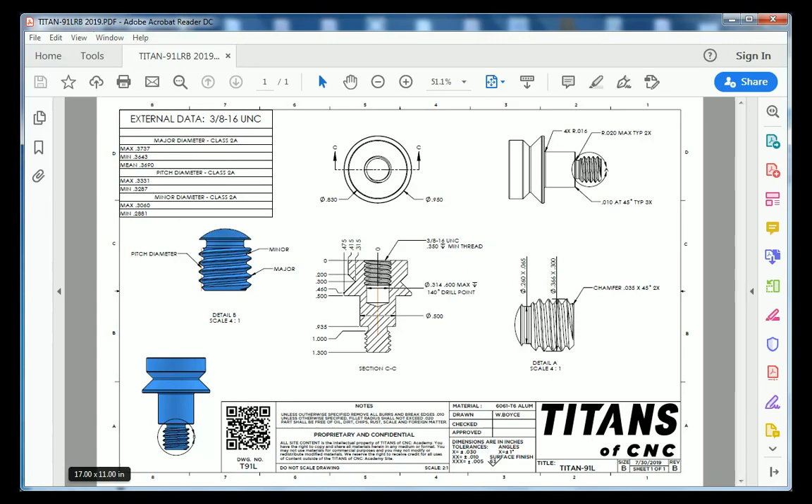I'm over here in Fusion 360 right now, and the very first thing that we're going to do to anchor this part is draw a line. This particular line is going to be the overall length of our part, which is 1 inch 300 thousandths. I'm going to zoom in there, and I'm going to drag this down a little bit.

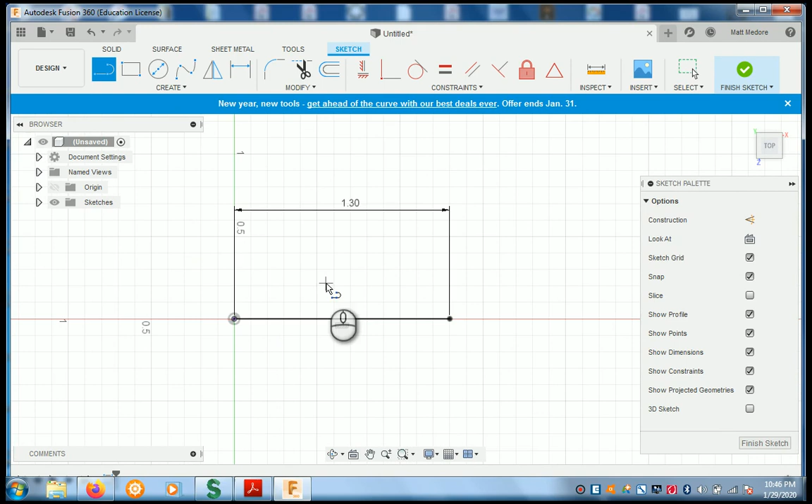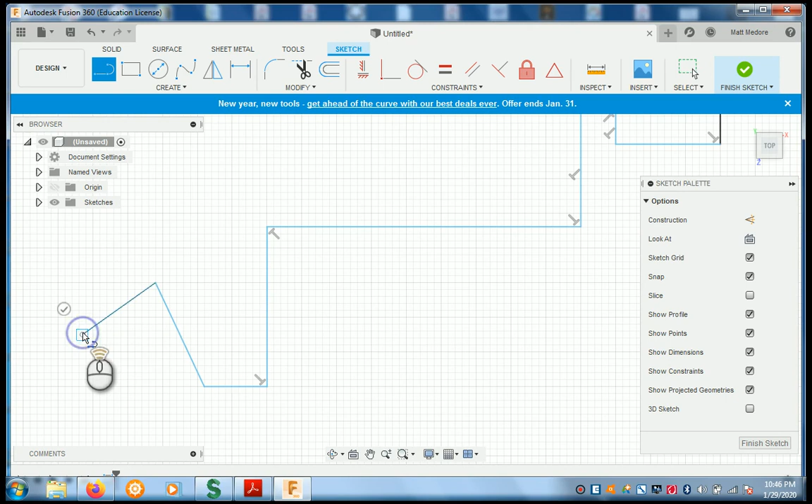Right now, all I'm going to do is sketch the outside profile of this part. So this section here is going to be our threads. Here's our thread relief, kind of like this. We have the shaft. We have this kind of V-shaped shoulder here. Doesn't need to be perfect, just a rough geometry of what this part's going to look like.

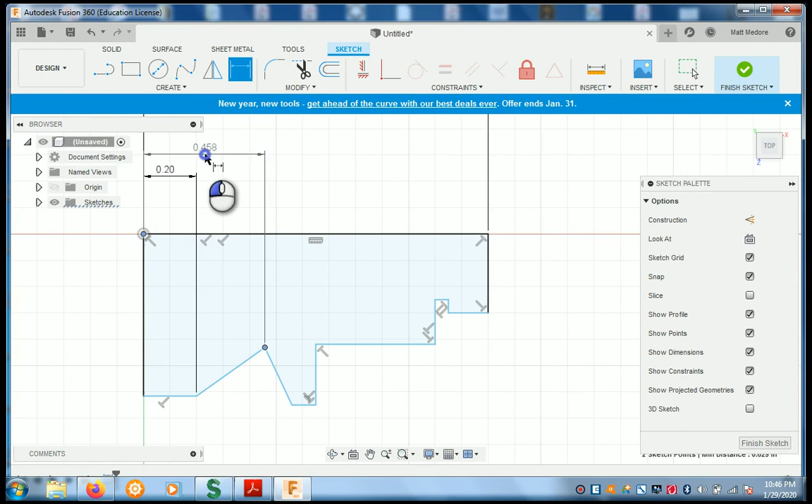Next thing we're going to do is jump over into the dimension mode. We're going to add some dimensions to this. From this point to this point is 200 thousandths. From this point to the bottom of our V here is 300 thousandths. From this point to the end of our shoulder is 500 thousandths.

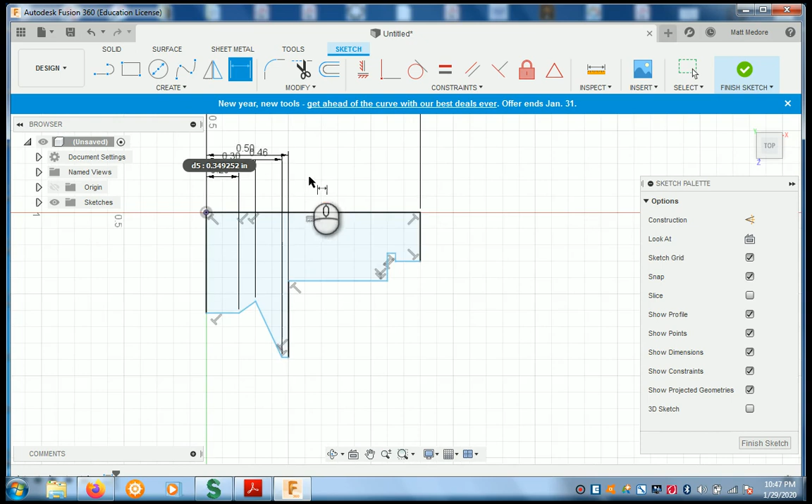Forgot one measurement. From this point to this point is 460 thousandths. Oops. From our datum over to our thread relief is 935 thousandths. From here to the back side of our threads is 1 inch.

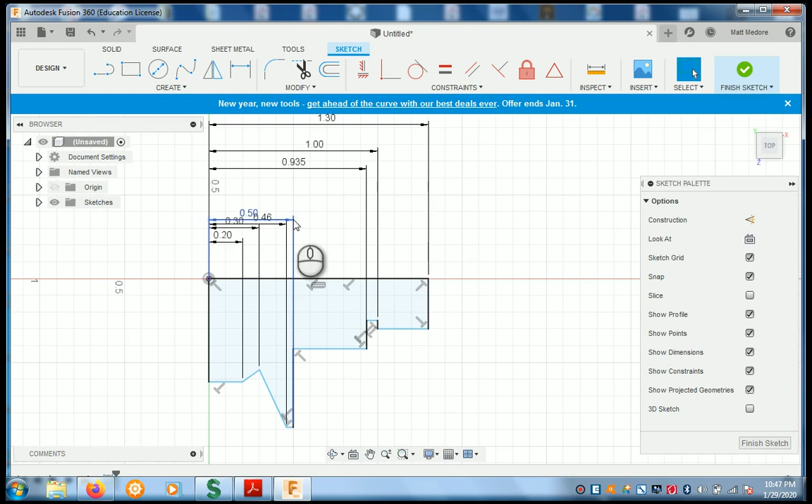And then I'm going to take a little bit of time to clean up my workspace so I can see these a little bit better. Some of these measurements got jumbled up on each other. There we go. Okay, so notice by just adding those measurements in, our part is actually taking shape. It's looking almost just like the print now. We're going to add in our radial measurements now.

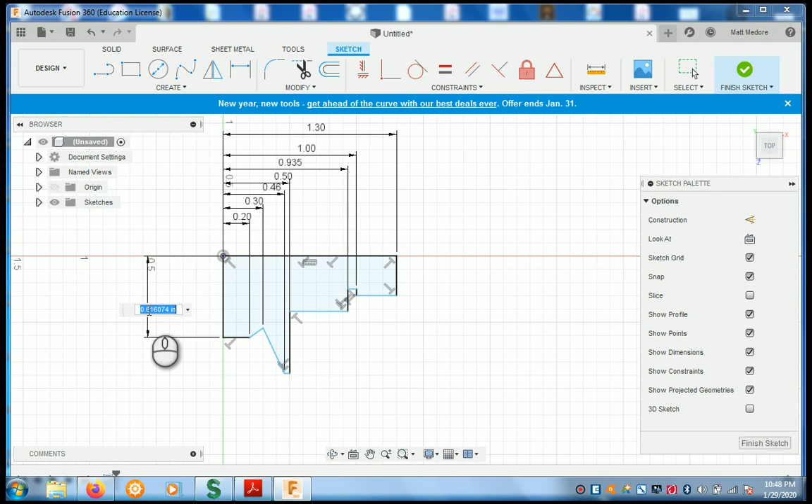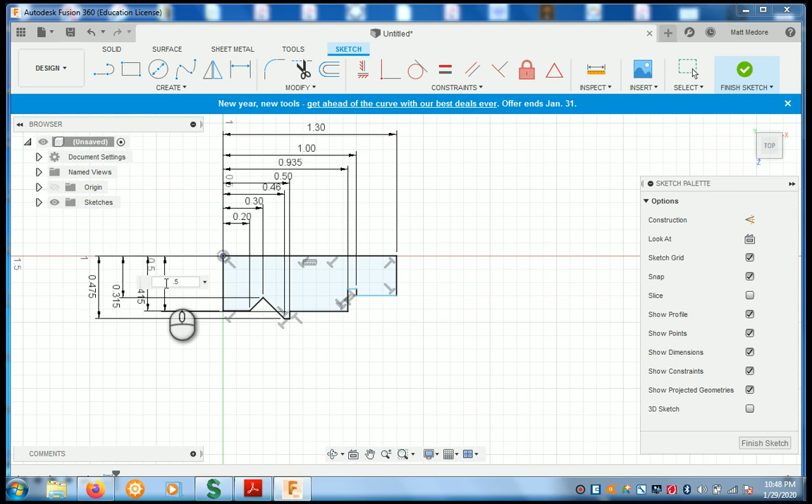According to the print, this is 415 thousandths. From here to here, this is 315. Here to here, 475. This one is 500 thousandths. We're going to divide that by 2. Oops. And for whatever reason, it doesn't like that measurement. 500 thousandths, we're going to divide it by 2.

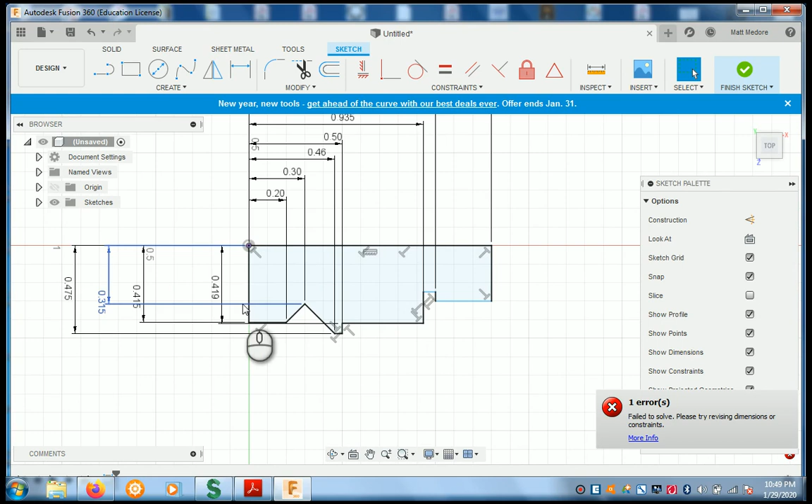I think what's happening is the part is over constrained right now. Just try typing that in. Yeah, so one of these constraints over here is causing it to act all goofy. So let's drag this in a little bit. See if that helps. There it goes. So this thread relief diameter was causing this measurement not to be able to be entered. So fix that one.

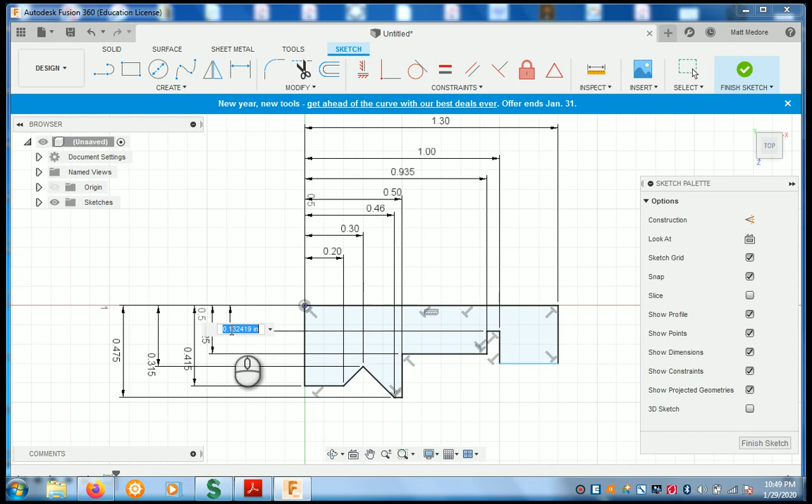Now we're going to measure that one. This one is 260 thousandths divided by 2. And then the major diameter of our thread is 366, divided by 2. Just like before, I'm going to organize my workspace a little bit, drag these measurements around so I can see them at a glance. Drag this one in here.

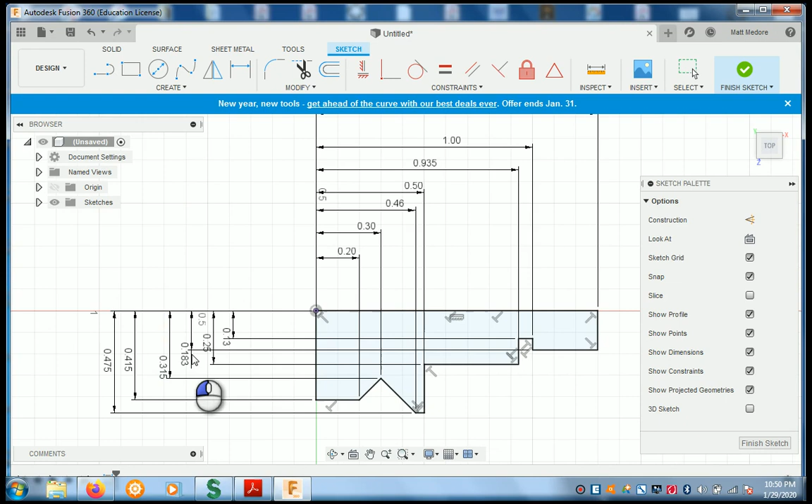Okay, ready to revolve the part. Go to solid, down to revolve. This is our axis. And here's our solid body.

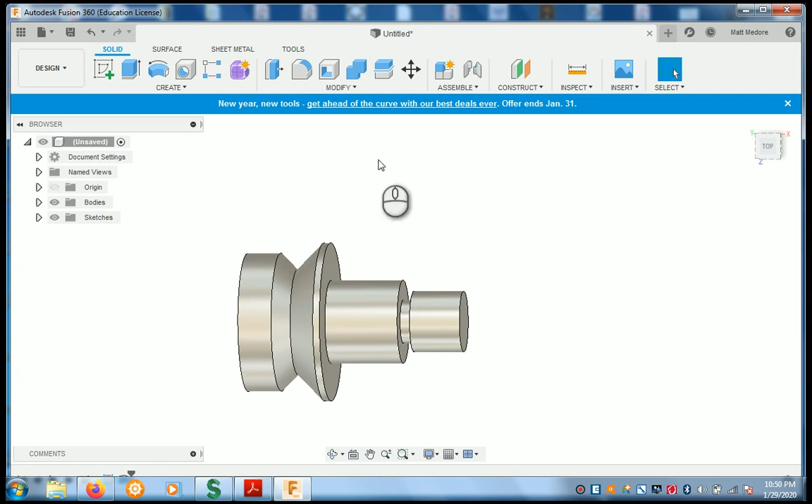Right now what we're going to do is we're going to add in some of our missing fillets. Modify down to fillet. First one we're going to look at is there's a fillet right down here in the corner, and on the print it says 4 times 16 thousandths. So that's indicating there's a fillet here, and there's 4 of them. So we need to count these out.

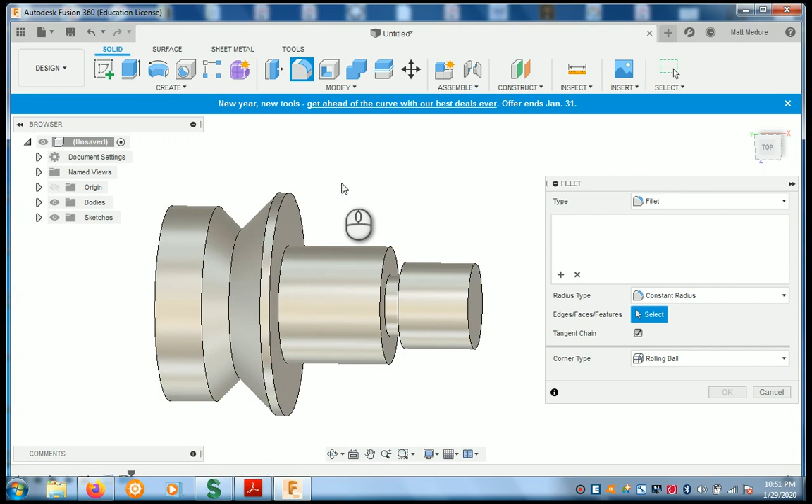So I'm assuming that obviously this one is 1. It appears like there's one down here in this groove, that's 2. And appears like there's one here, 3. And I'm assuming this is the 4th one here. I wish they did a better job of clarifying this on the print. This is something that if I was making the print, I would actually change and add a little better clarification. So what we're going to do is take those: 1, 2, 3, 4. I'm going to type in 16 thousandths and then OK.

Right click, repeat fillet. We're going to add in the thread relief fillets. So those 2 lines there at 20 thousandths max.

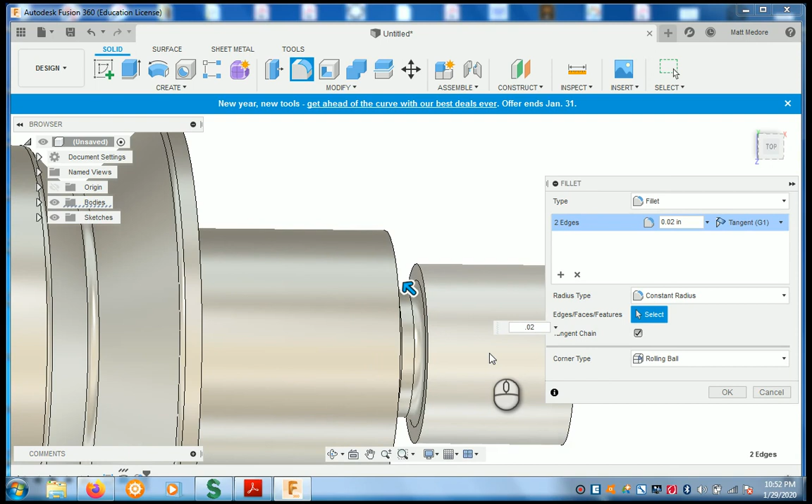And then we're going to add in our chamfers. We're going to chamfer this line at 35 thousandths.

Oh, didn't like that one for whatever reason. So notice that we're coming up with this error here, and basically what's happening is our previous chamfer, or the previous fillet, is causing it to do that. So let's see if we can add that in first.

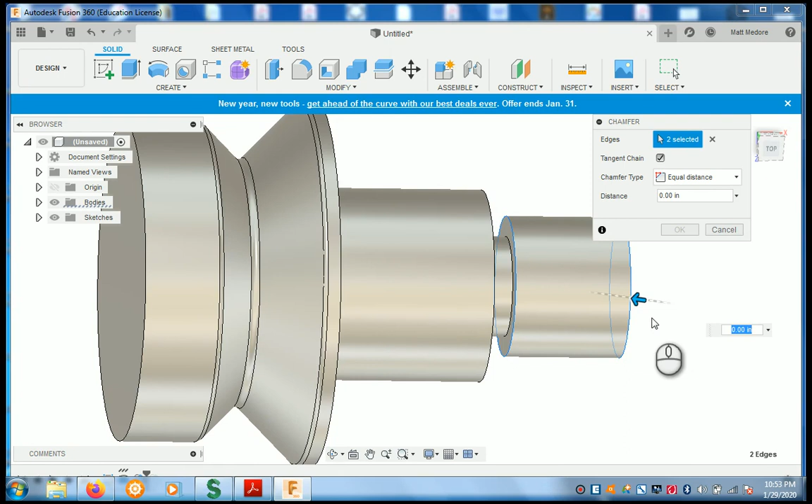So chamfer, I'm going to roll my history back forward. It's kind of interesting. Okay. Right click, repeat. Sorry, we're going to have to go back to chamfer because we rolled our history.

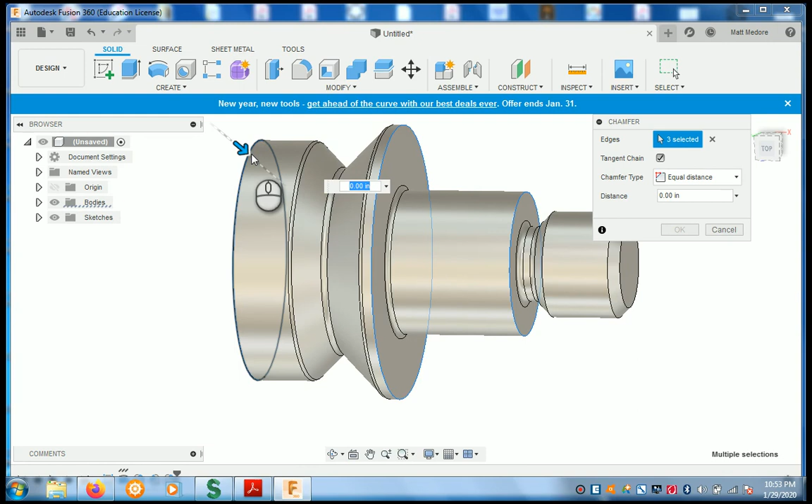And then we're going to chamfer these 3 edges here at 10 thousandths at 45 degrees. And then we're going to apply our threads onto this face.

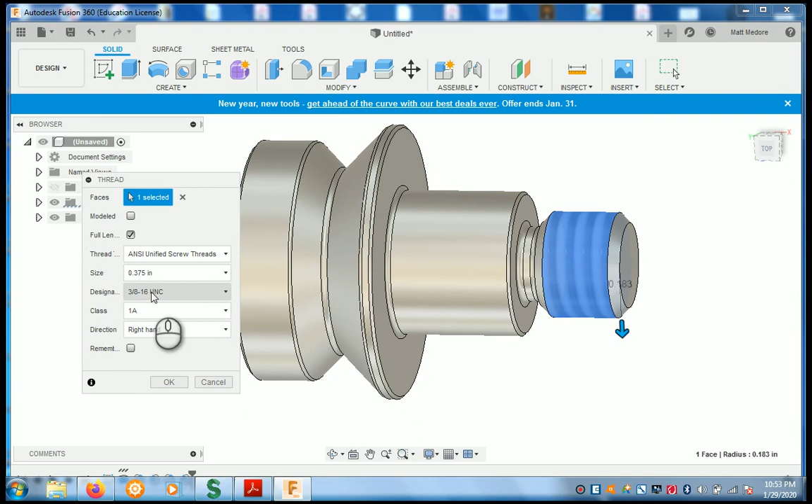Now these threads here are going to be 3/8-16 threads. Decimal equivalent of 3/8 is 375 thousandths. Designation is 16 threads per inch, Class 2A. And then we're going to model these threads because I actually want to see them, I don't want just a picture of them.

So here's our part, getting pretty close to being done. Last thing that we need to do is over here on this side, we are actually going to drill and tap a hole.

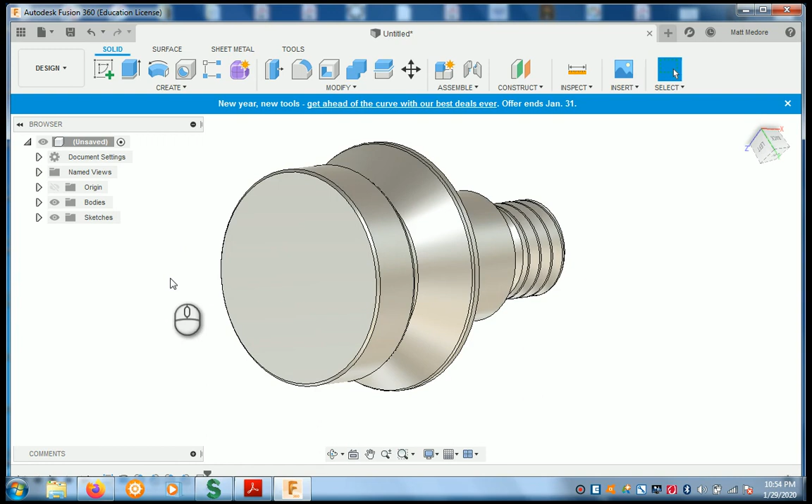We're going to turn on our origin. I'm going to go to hole. I'm going to click on our origin, use that as an anchoring point because that's in the exact center of our part.

This particular hole, there's no chamfer stated other than break all edges, so we're going to disregard that for this particular hole. What we're going to do, it needs to be tapped, the threads need to be offset, and then the hole type is going to be simple.

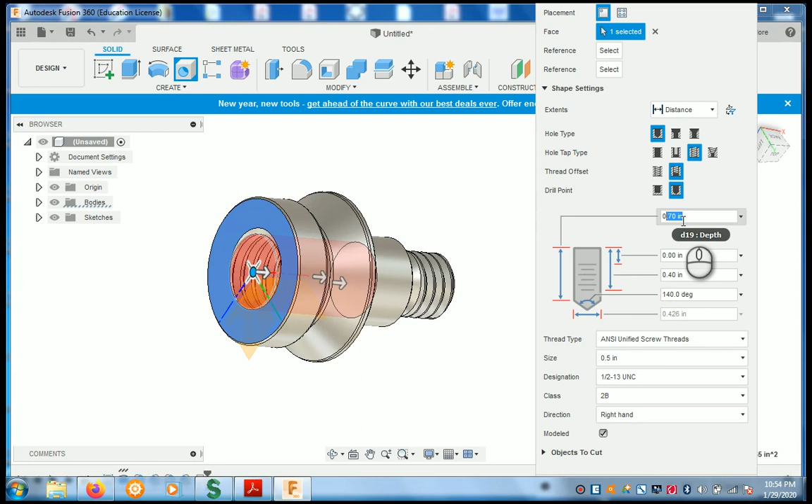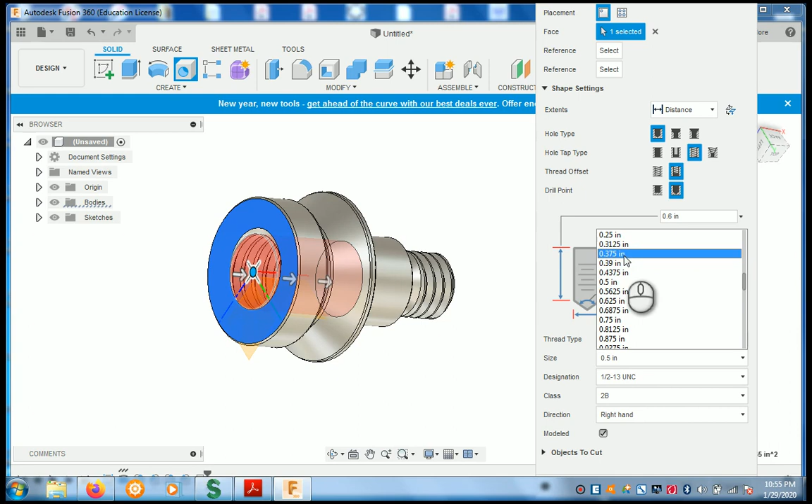The drill depth, so the overall depth here is going to be 600 thousandths max, so I'm going to go to the max limit, 600. The length of my threads is going to be 350 thousandths, and then they also are specifying that they want you to use a 140 degree included angle drill bit. And these threads are going to be 375 thousandths, or 3/8-16, class 2B. And then we are going to model those threads and press enter or OK.

And I'm going to turn my origin off there. So this is a good opportunity: check your part, make sure that you got everything off the print onto your part. And this concludes making the Titan 91L.